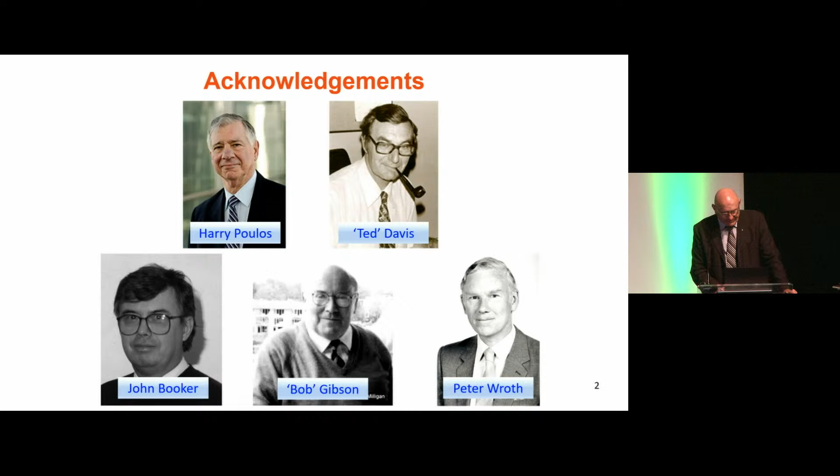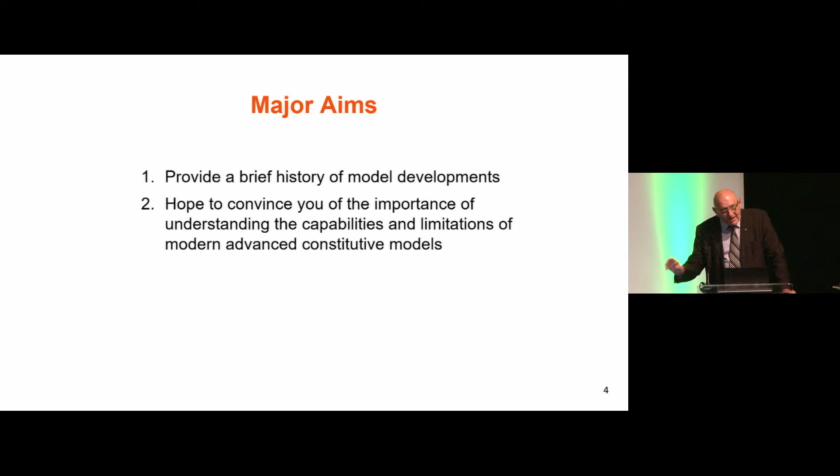My major aims in this presentation are twofold. Firstly, I'd like to present my own interpretation of what's happened in this field of significance in this field over the last 50 years or so. And secondly, I hope to convince you, if convincing is indeed necessary, of the importance of understanding the capabilities and especially the limitations of the models we use in our advanced numerical analysis these days. Many of the models that I will mention are now available in commercial software. So I think it's incumbent on those using that software and even those directing its use to understand how such models behave.

But let me begin by making a few introductory remarks about modelling in general and constitutive modelling in particular. And I think we'd all recognise that modelling is now an important aspect of geotechnical engineering. I would argue that the development and use of constitutive model involves both art and science, and I hope that will come through during this presentation. I believe it's important to understand that in any application we choose, the model we choose to adopt really is dependent on the questions that are being asked and on the particular predictions of the behaviour of the physical system that we're interested in, obviously. But we should always remember that models are merely imperfect idealisations of reality.

Perhaps the best way, or a good way to illustrate what I mean, is to consider the problem of a ship at sea, and I'm indebted to Professor Calladine of Cambridge for this nautical example. If you're the navigator of that ship, you're probably only interested in where it is in space, where it is on the ocean, what its coordinates are. So your model of that ship may be just simply a point in space. But if you're the pilot or the captain of that ship and you have to bring it into port and bring it alongside a wharf, I think you'd need more than a conceptual model that involves just a point. You probably need to know where the bow of the ship is and the stern of the ship and the beam so that you don't cause any damage. And you can extend this analogy. If you're the hydrodynamics engineer designing the hull, your geometric or conceptual model at least would be probably more than what I've just described.

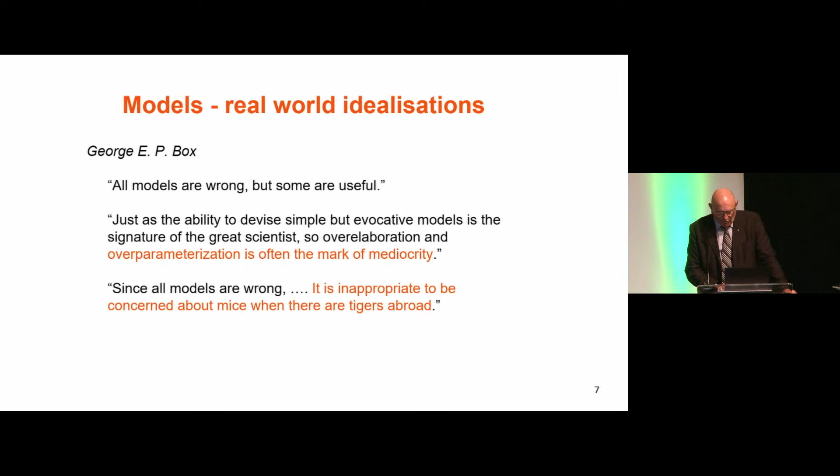Well, what are the constitutive models for soil that I'm talking about? Simply, they are mathematical relationships between stresses and strains. I'll address this issue in a little more detail as we go on, but let me assure you at the outset that as much as possible I will be emphasising the physical concepts embodied in the constitutive relations, and I'll try very hard not to obscure that with complex mathematical detail.

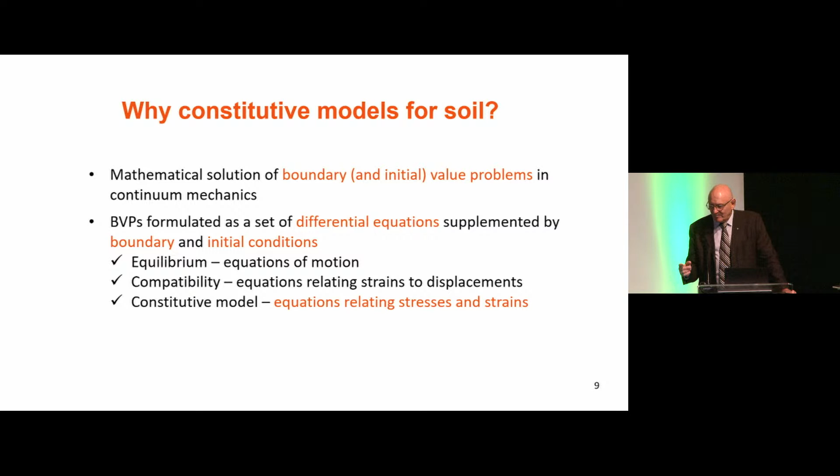Well, this slide addresses the question of why develop models at all. In computational geomechanics, we generally seek mathematical solutions to what are known as boundary value problems or initial value problems. Very often in doing so, we would represent our soil body as a continuum. It's useful to remind ourselves that these boundary value problems are usually formulated as a set of differential equations which might be subjected to particular conditions. These equations would set out in mathematical detail the three conditions of equilibrium, compatibility, and the constitutive relationships that have to be obeyed. And it's the last that I'll be focusing on in this lecture.

Now, over the last 5 or 6 decades, there's been an explosion in the number of journal and conference papers devoted to this topic. There are also excellent textbooks written on the subject. In fact, there are so many publications that I find it exceedingly difficult to keep on top of the subject and be alert to all the new ideas. There's a website devoted to the topic as well, which is rather useful.

In fact, there have been so many developments that it's impossible to cover them all adequately in one lecture, and so I will necessarily have to be selective, and I'll consider only a very small subset of the models that have been published to date. In the main, I'll concentrate on models developed either for single-phase soils or saturated soils to describe their behaviour under statically applied monotonic loading. I will briefly mention models for cyclic loading as well.

Well, it's useful to consider the various ways we might classify constitutive models for soils, and physical scale can be quite useful. We can model at various scales all the way from the quantum up to the continuum, and if you're doing molecular dynamics, of course, you'd be working at the atomic scale. If you're trying to resolve the microstructure of a material, you'd be at the mesoscale. But if we're analysing engineering structures, which is what we mostly do, we're normally working at the continuum scale, and this lecture will focus on models at the scale required for continuum analysis.

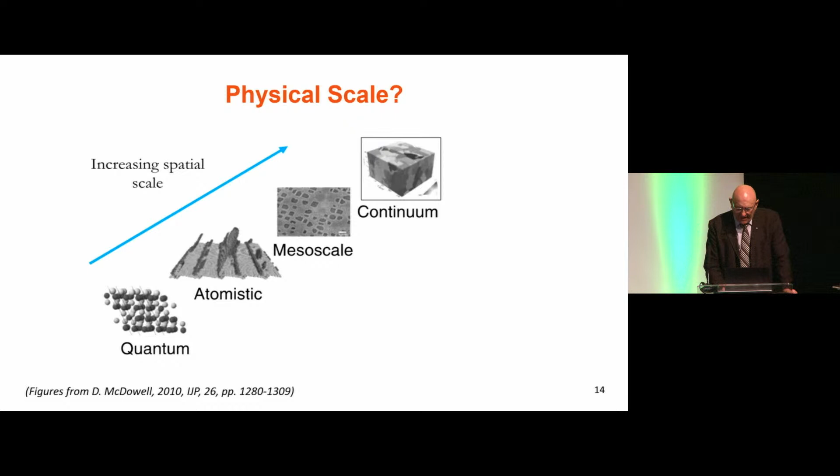And you can develop those models in at least 2 ways. You could upscale from the lower scale to the higher by homogenising in some way, or you could simply dream up relationships between the stresses and the strains. I would call that a phenomenological approach, and that's the one that I'll be talking about in this lecture.

Now, there are a number of factors that complicate the stress-strain behaviour of soils, both natural and reconstituted. They complicate the mathematical treatment because of the non-linearities they introduce, and I've listed some of the more important ones here. First, we know that most soils either harden or soften during loading, and sometimes they do both. We also know that changes in volume often accompany the shearing of the soil.

The behaviour of natural soils is often different from that same soil that's been reconstituted in the laboratory. In particular, they may possess a structure and a fabric, and they may exhibit anisotropy. Some soils are susceptible to rate, the response they provide depends on the rate at which you load them, further complicating the issue.

The loading may not be monotonic in reality. It may be cyclic, or repeated loading. And then we have the age-old problem of how do we determine the parameters. That can be very problematic.

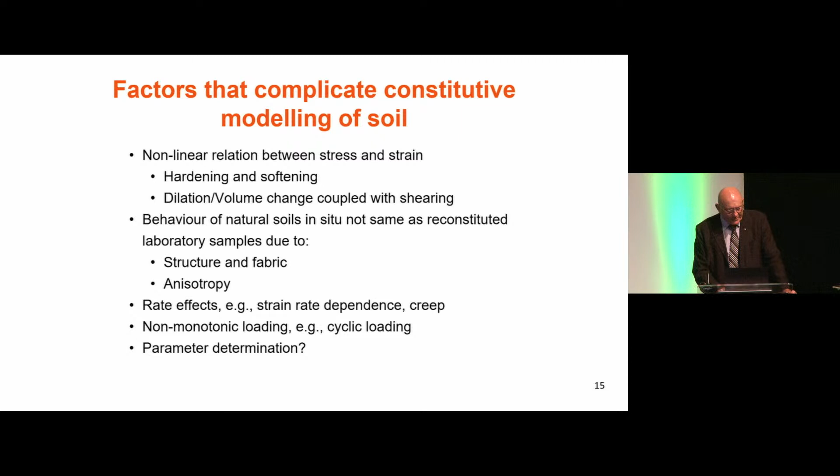Well, let me now explore some of the advanced constitutive models for soil continua. In doing so, it's worth keeping in mind the fact that this is an area of research that continues to expand, and new models seem to appear quite regularly. Given the time constraints, I'll focus solely on what I've called conventional elastoplastic constitutive models.

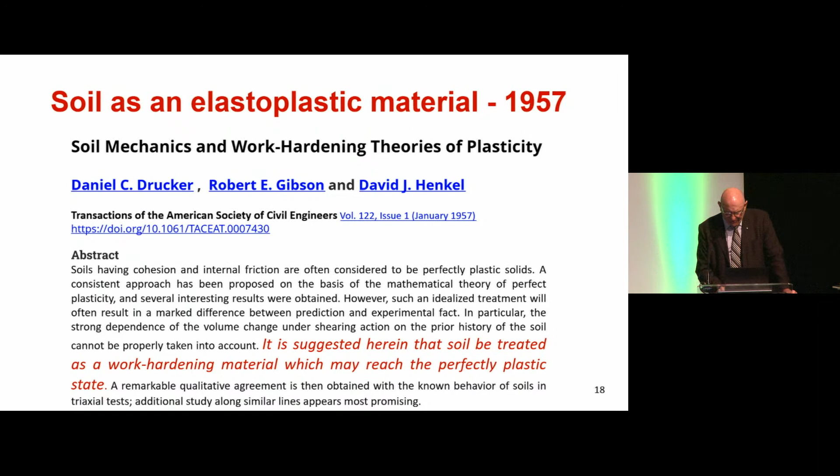One of the earliest suggestions that soil could be idealised as a work-hardening elastoplastic material was presented in the famous paper by Drucker, Gibson and Henkel in 1957. The authors didn't flesh out the detail of how this could be done, but nevertheless they pointed the way forward. At about the same time, as we know, research at Cambridge was putting some flesh on these bones that was suggested by Drucker and others. It was followed about a decade later by the first textbook describing critical state soil models.

Well, I'd like to spend a little time reminding ourselves about the essential components of such models. One of the fundamental assumptions is that the strain consists of two parts: an elastic recoverable component and a plastic irrecoverable component, and they're usually assumed to be additive. So, if I may, let us delve further, investigating, first of all, the recoverable or the elastic part.

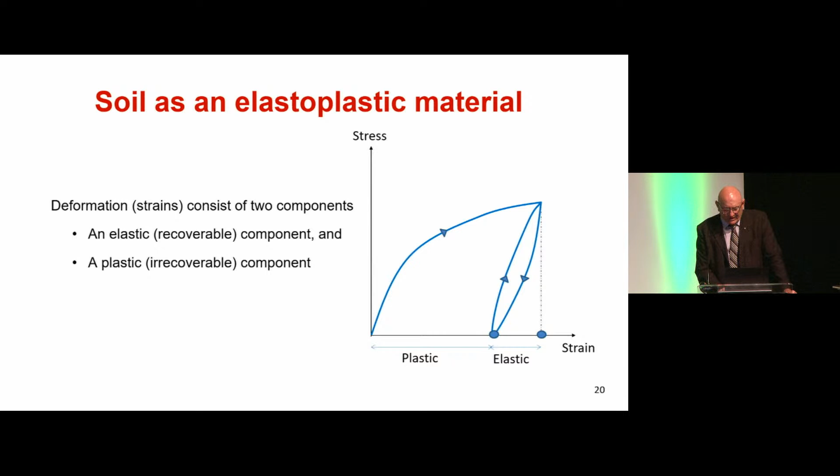Now, ideally, what's required for elastic behaviour is a model that predicts a conservative response. And by conservative, I mean if a soil element is exposed to a closed loop in stress space, then there should be no change in the configuration of the soil element. There should be no net strain. This corresponds obviously to no generation or no absorption of energy. Well, perhaps surprisingly, not all the so-called models based on the theory of elasticity that we're familiar with, and some of which we use routinely, can boast this claim.

Within the theory of elasticity, there are at least three subclasses of model. They're the hypoelastic, the elastic, and the hyperelastic model. They have distinguishing features, and some examples of them are in this table, which I don't intend to go through in great detail. Probably the most familiar is Hooke's law. The least restrictive form of the models are the so-called hypoelastic variety, and a classic example is the nonlinear elastic model introduced by Duncan and Chang way back in 1970.

Similarly, if we want to focus now on the elastoplastic constitutive models, there's a similar hierarchy or division into classes. Many of you will be familiar with the existence of modified Cam-Clay, and it's probably the most famous. It's what I'm referring to here as a conventional elastoplastic model. But in recent years, there's been a growing body of research focused on the so-called hypoplastic and hyperplastic models for soils. One of the main distinguishing features of the hypoplastic models is, unlike the classical elastoplastic models, there's no need to split the strain into the elastic and plastic components.

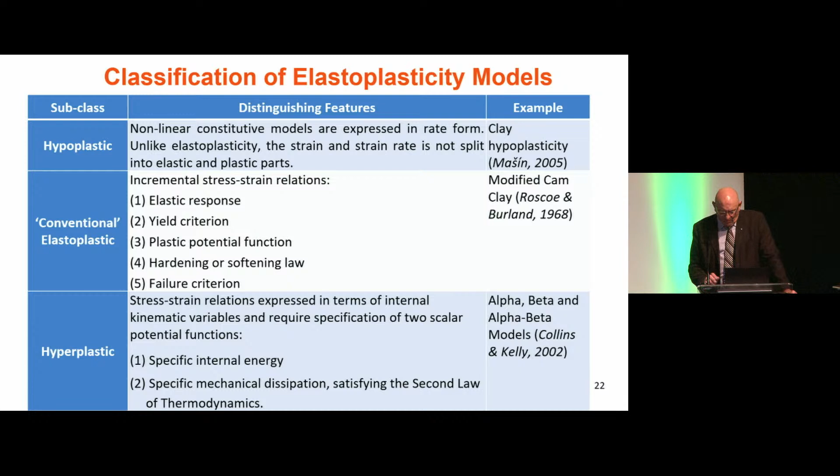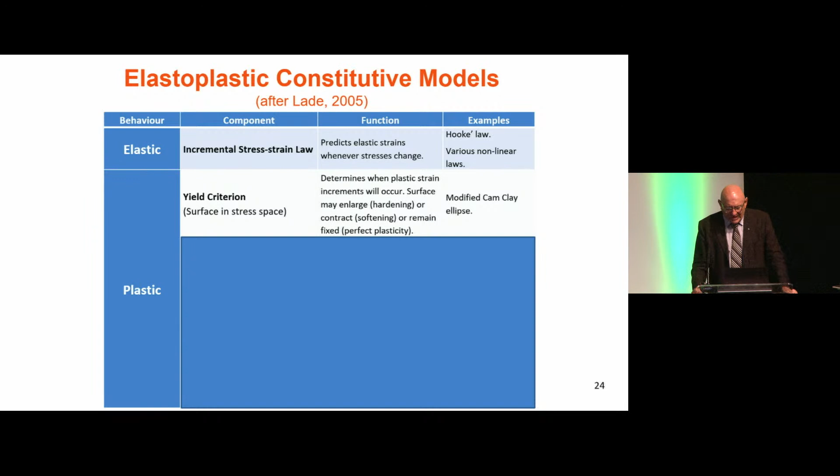Now, the table I'm showing here would be reasonably familiar, I would hope. It describes the essential components of conventional elastoplastic models. Of course, various laws could be adopted to describe the elastic component of straining, but Hooke's law is probably the most famous. But when it comes to defining the plastic component of that strain, we need four quantities or functions to be defined. First of all, a yield criterion, which is usually imagined as some surface in stress space which identifies the combinations of stress that cause plastic straining.

The second plasticity component is something that determines the relative magnitudes of the plastic strain components. The third component or function determines the actual magnitudes of those plastic strains. And of course, at the end of the day, we need a failure criterion that places a limit on the stresses that can actually be reached. The critical state line is a particularly good example of such a limit.

Well, early model developments were based on experimental data from so-called single-element laboratory tests on reconstituted soils, and we still rely on the results of such tests today for model development. But in the early days, the models were simple extensions of theories developed for metals. But unlike metals, of course, we know soils are particulate materials, and so major departures from those theories were required.

Cam-Clay and modified Cam-Clay are notable examples of those earlier theories that took into account this particulate nature and specifically allowed coupling between the volumetric and the shear behaviour. But it's important to reiterate, they were developed based on experimental data for reconstituted soil, so in my mind it would be unreasonable to expect them to describe adequately many complicated aspects of the mechanical behaviour observed for natural soils in situ.

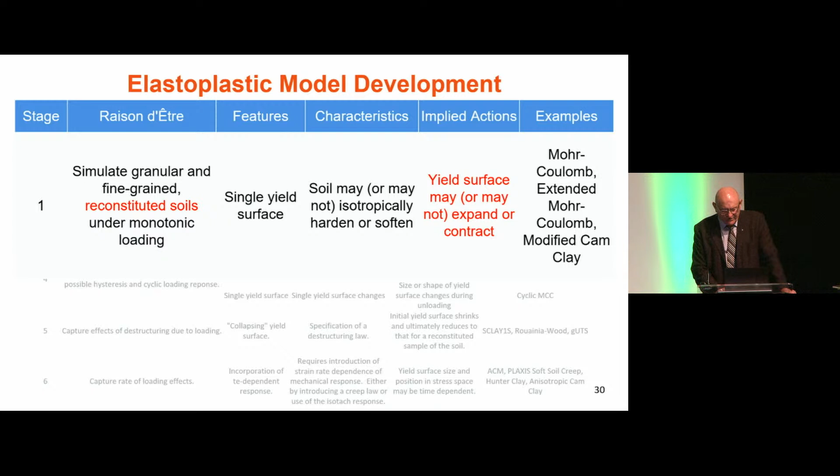Cam-Clay and modified Cam-Clay that I mentioned were very significant developments. For probably the first time, they provided the details of a complete strain hardening model for soil. And I won't spend any time going into the detail because the salient features should be fairly well known. But for the first time, we had a model that predicted in detail the effects of consolidation, for example, on shear strength. And I think that was a major achievement.

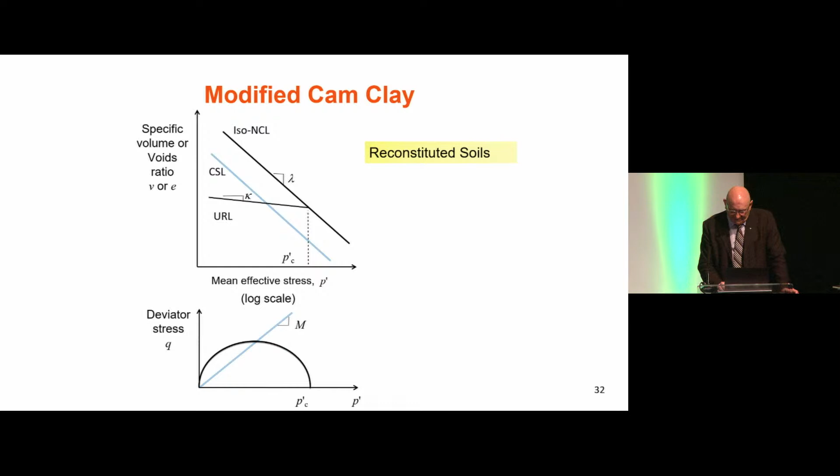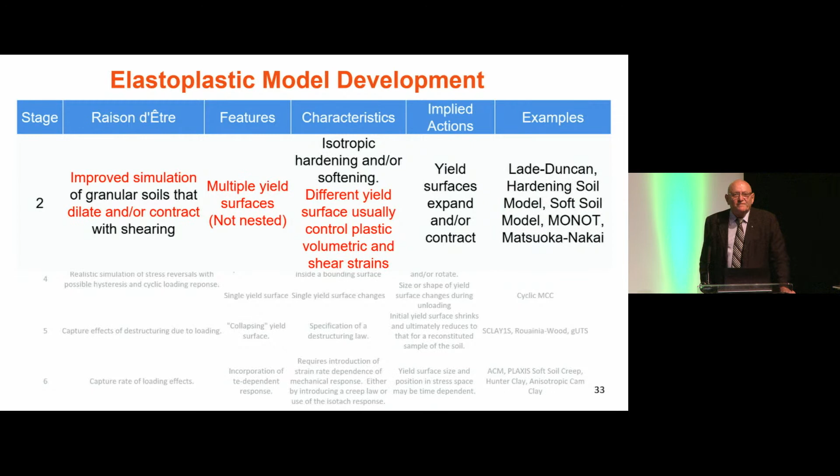Well, improvements to those early models were aimed simply at providing more accurate descriptions of the mechanical response of real soils. And some of these developments included the suggestion of, well, maybe we could use more than one yield surface, allowing the possibility of different surfaces controlling the volumetric and the shear strain hardening. And there are many examples of this type of model now available. Examples include the various hardening models that you can find encoded in commercial software packages. It's possible that some or all yield surfaces may be engaged simultaneously, so that hardening and softening could, theoretically, occur simultaneously.

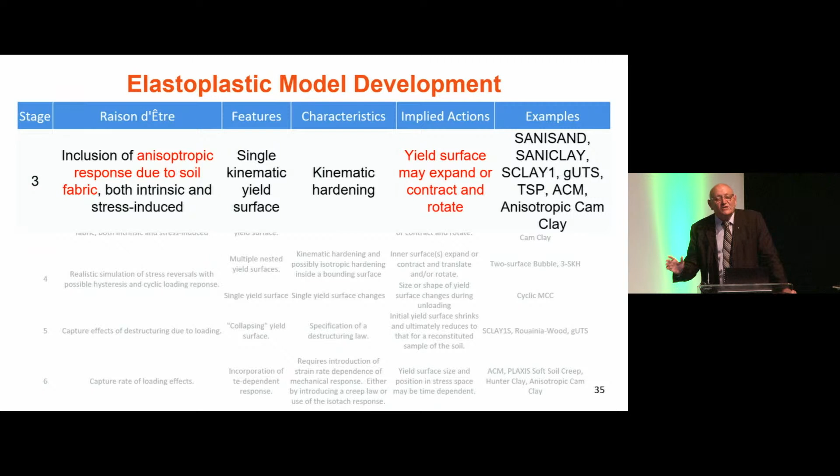And then moving on, there was recognition that many soils exhibit anisotropic response to loading or unloading. That is where the response may be directionally dependent, either intrinsically because of the nature of the soil or induced by the stresses that are being placed on the soil. And that realisation fostered the development of a whole subclass of elastoplastic models. There are numerous examples of this type of model in the literature. Just as an aside, the mathematical formulation of models to describe anisotropy requires the use of all 6 stress components or some meaningful combination of them. And this contrasts with models that describe isotropic behaviour that really only need 3 stress invariants to completely describe the behaviour.

Further model complexity and capability was added over time due to the desire to model the hysteretic response that we see when we apply stress reversals or so-called cyclic loading. In the main, that's been achieved in one of 2 ways, either with multiple nested yield surfaces or with a single yield surface that can change either its size or its shape as the loading direction changes. And I'll attempt to just briefly illustrate both of these methods.

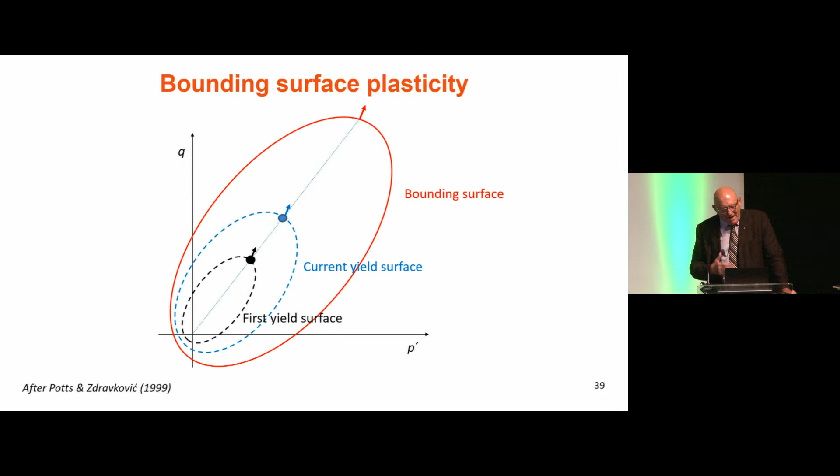But first I need to mention the concept of a bounding surface. It's an important concept that was introduced by Dafalias and others. And in some models of this type, the yield surface may expand inside the bounding surface while it obeys some mapping rule, as shown in this sequence of slides. And the following animation shows an example of the bubble model approach to describe cyclic loading, which employs a bounding surface. So for a soil that's initially K0 consolidated and then unloaded and reloaded, the progression may look like this cartoon that you're looking at now. And it normally results in the prediction of a hysteretic response.

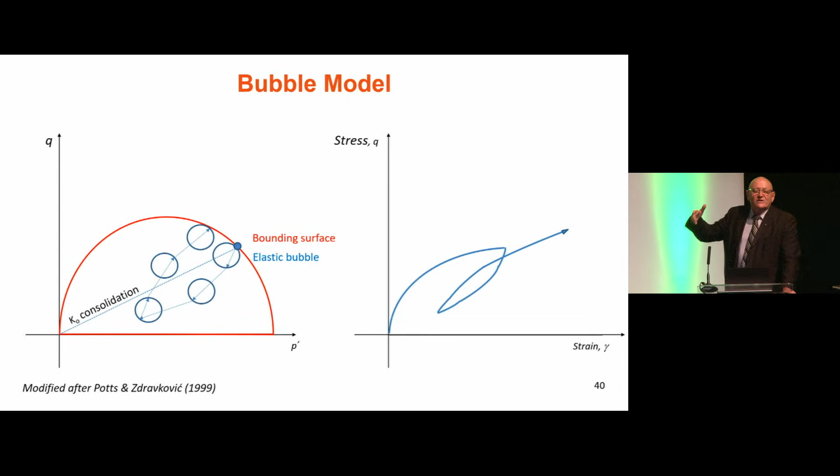we'll start out with a soil that's initially isotropically consolidated. The first half cycle of shearing causes the yield surface to expand, and of course that expansion, it's an undrained event, so it causes no volume change, provided the plastic and elastic strains exactly balance each other. Now, during the unloading, undrained unloading, the soil, in this model, would behave elastically, and it's isotropic, so the stress path must move vertically downwards. The yield surface size in this particular model needs to be maintained as constant to uphold the condition of zero volume change, but it may change its shape.

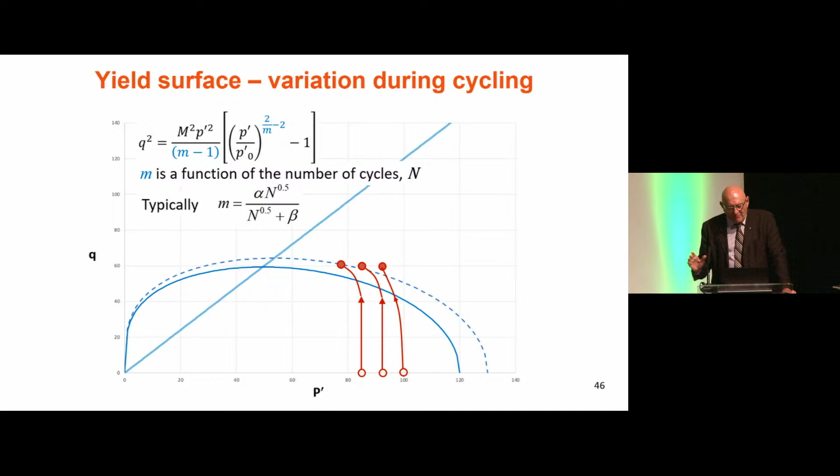And this can be achieved if you somehow allow that parameter m, which governs the yield surface shape, to be some function of the cyclic loading, the number of cycles, for example. So that by the time you go through up to 2.5 cycles of loading, you would have changed the shape in various ways. And the trick in applying this to the prediction of cyclic loading behaviour is to define how that parameter m changes as the cycling changes. One possibility is indicated in this diagram. There could be many other choices, and of course it has to be recognised this is a purely phenomenological approach to the problem, but I would contend that it does have some utility.

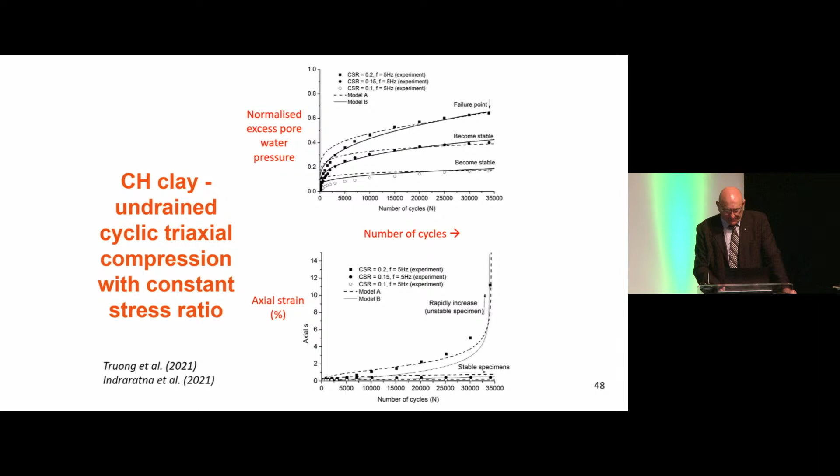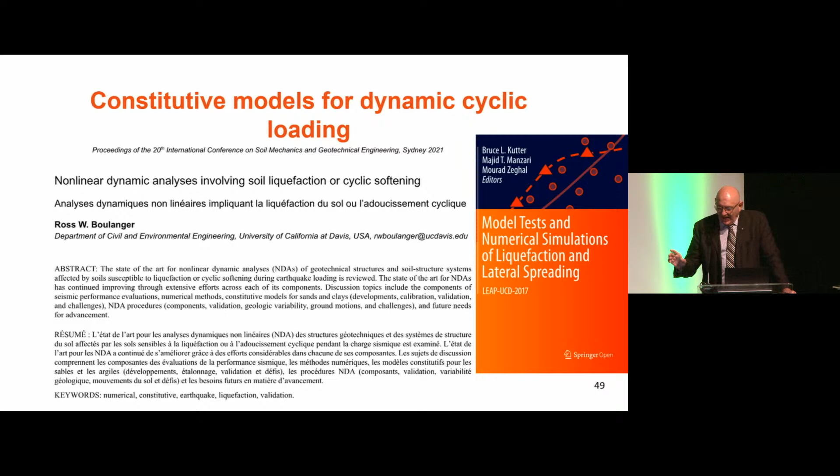Well, this is a bit of an aside, but perhaps it's curious, I think, that there's already been a great deal of work investigating constitutive models that can be used to predict soil behaviour under rapidly applied cyclic loading. I'm talking about problems that involve a dynamic loading component as well as simple reversal of the load, the sort of loading you'd experience during an earthquake. And I won't be covering this aspect in this lecture, but I'd refer you to an excellent summary that was a state-of-the-art paper in the most recent ISSMGE conference held in Sydney. And in that paper, the author Ross Boulanger made great use of and great reference to a very detailed set of liquefaction studies reported in the proceedings that I've just brought up on the screen.

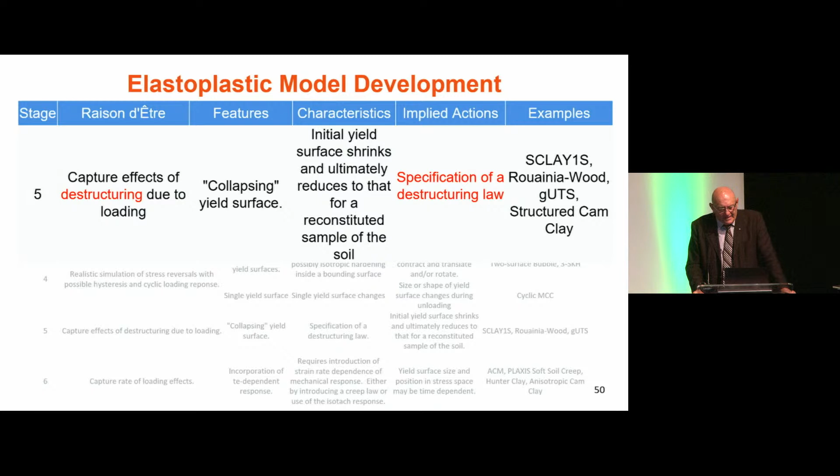Well, moving on, another feature of real soil behaviour that has been incorporated in our advanced soil models is the effect of soil structure, and in particular any effects of destructuring, or some may call it destructuration, that occurs as the soil is further loaded or perturbed. And these models should generally provide predictions of real soil behaviour that will eventually approach the behaviour that you observe for a reconstituted soil as the structure is progressively removed by the continued loading. So they require specification of how destructuring will occur with loading.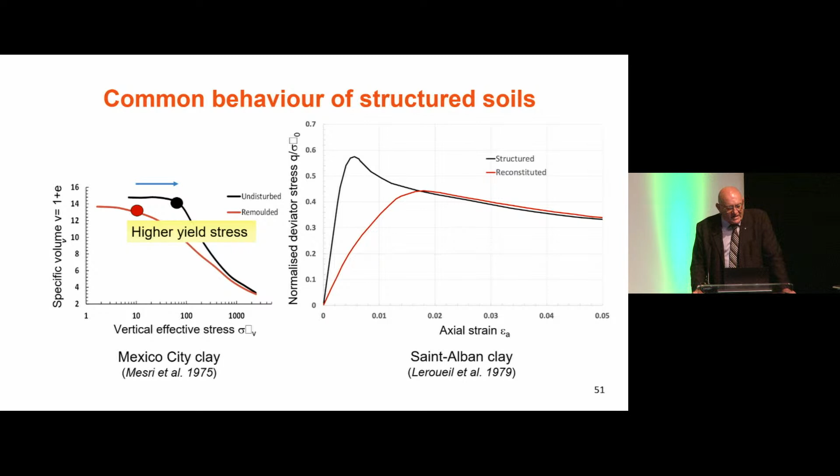And if one conducts shear tests on a structured material and compares it with the same soil that's just been reconstituted, you might get a comparison like you see here, and a suggestion that the structured material might have a higher peak strength. So those are the sort of features that we need to capture in our models of structured materials, and the progressive destructuring that will occur once we continue on with the loading.

So some of the distinguishing features of successful models for structured soil are, firstly, the structured material should have a larger yield surface and larger voids ratio at the same value of mean effective stress. And you need a means of describing any destructuring or destructuration that will take place with increasing stress level.

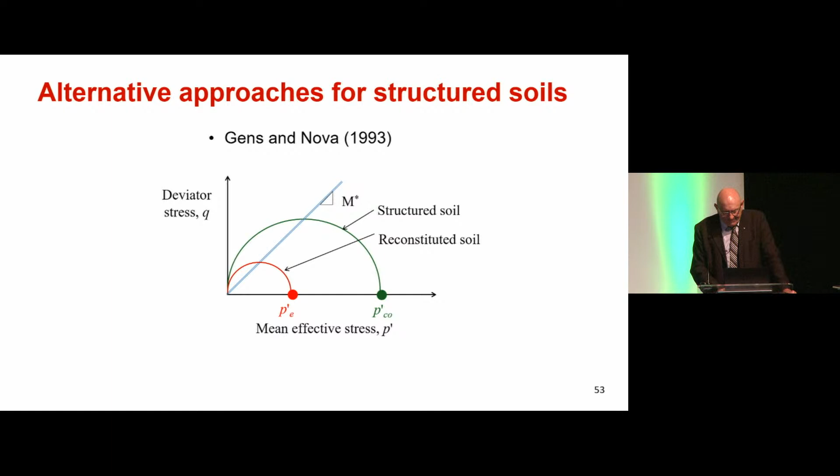Well, several approaches have been suggested for modelling this class of material, and in 1993, Antonio Gens and Roberto Nova suggested one such approach. They assumed that the ratio of the sizes of the yield surface for the structured soil compared to the one for the reconstituted soil could be described as some function of plastic straining, perhaps more specifically, some combination of the plastic volumetric and plastic shear strain components. And it seemed a sensible way forward.

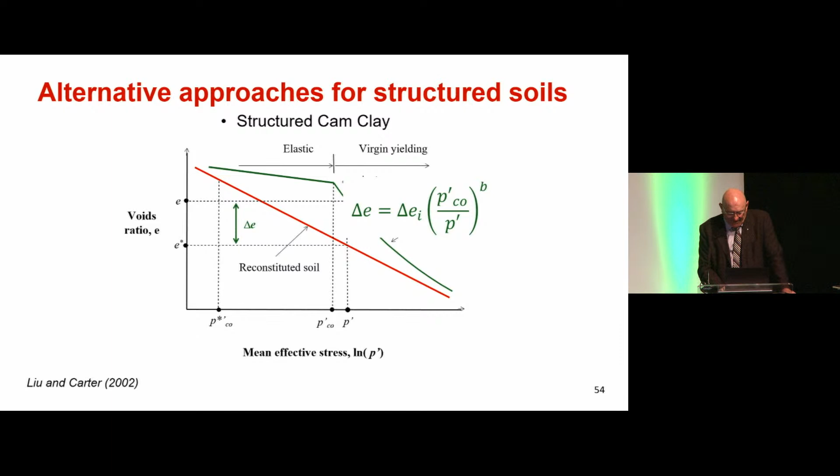Well, you notice that at any pressure, the two curves are separated by an additional voids ratio I've called delta e. There are two portions of the green curve, there's a sort of division at a pressure I've indicated as p'c0. So at any consolidation pressure less than p'c0, it's assumed that the behaviour is elastic and therefore recoverable, but beyond p'c0, plastic straining takes place, and this is described as virgin yielding. We discovered that a simple exponential function could be fitted to that data for a whole host of soils that we looked at. So one can describe the descending, plastic portion of that curve for the structured soil by defining how the voids ratio that's sustained by structure gradually reduces.

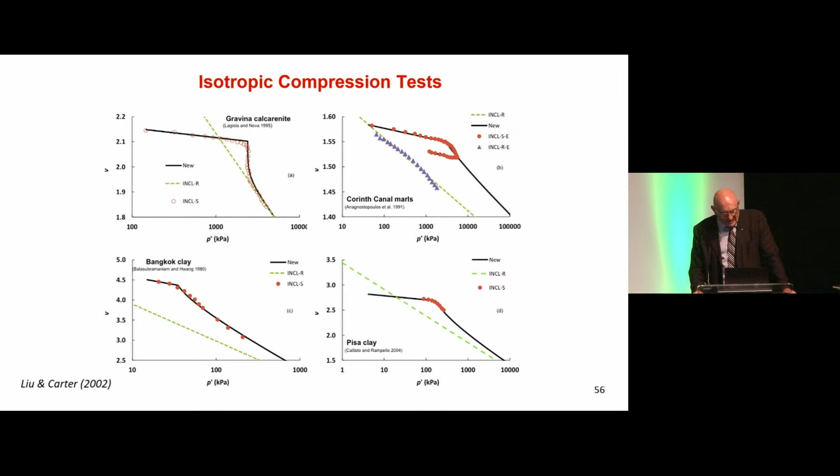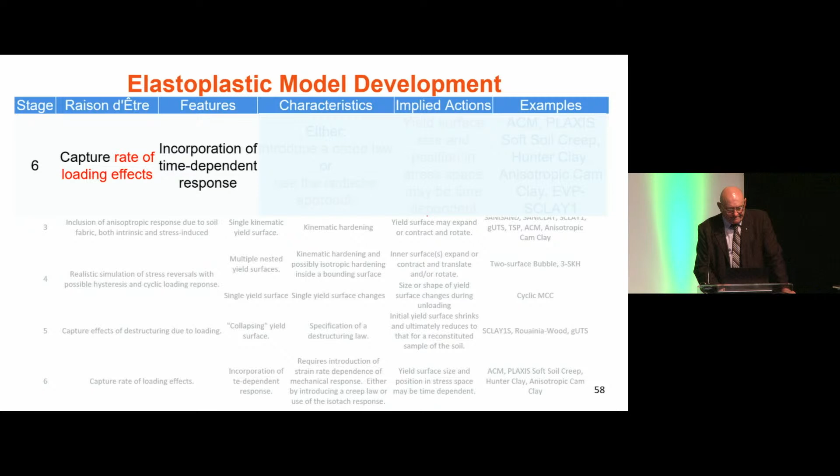Well, moving on again, one of the most difficult features to include in soil constitutive models, in my opinion anyway, and probably the least developed area of research, not that people aren't working on it, is trying to work out how to effectively and adequately include the rate of loading and its effects into a constitutive model. It's an area that I think needs more work. The way this is done at the moment is either you introduce some form of creep law into the constitutive model, which then invokes the theory of elasto-viscoplasticity, or you can use what's known as the isotach approach, in which case the behaviour is assumed to depend on the rate of straining in some way.

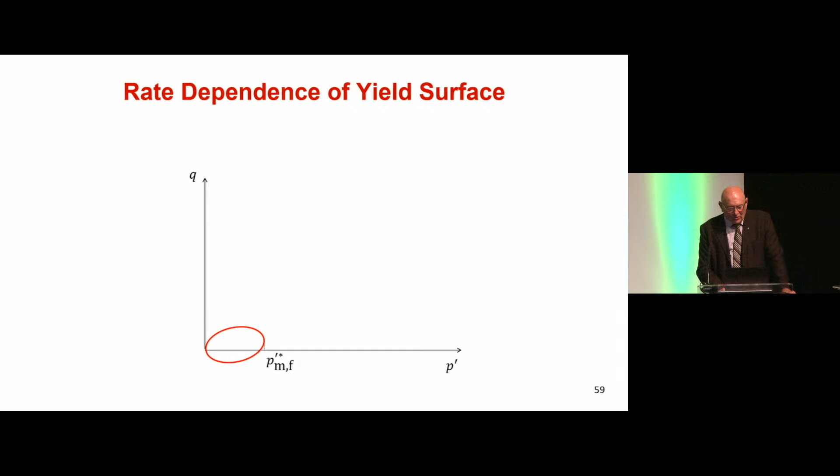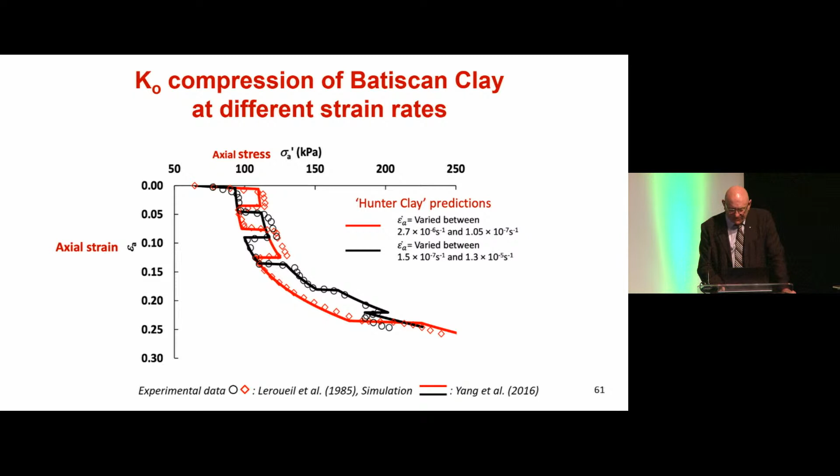And you can see it's possible to get a reasonable match. But as I said, I think there's still scope for further work. An alternative approach utilises, as I mentioned, the theory of elasto-viscoplasticity.

If I may, I'd now like to mention the quest to obtain unified soil models. I mean, models that can cover all types of soil regardless of particle size, where the only difference, say, between a sand and a clay might be the choice of the values for the model input parameters. And there are several examples of these models in the literature. They include a model known as CASM, clay and sand model, I think it stands for.

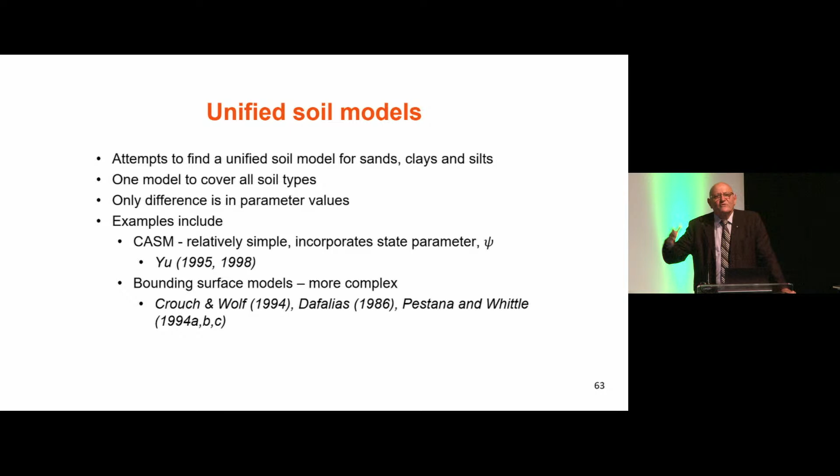But there are also various bounding surface models that I mentioned previously. If I may, I'd like to just talk about one of them. It's the model CASM, developed originally by Hai-Sui Yu and later extended by him and his colleagues. And a key feature of this model is the incorporation of what is known as the state parameter, which I should now describe for those unfamiliar with it.

In my opinion, it's one of the very significant developments in constitutive modelling over the past 50 years, and it involved the introduction of this concept of a state parameter by Been and Jefferies and recognition of its significance. It has a simple definition. It's the difference between the current voids ratio and the voids ratio on the critical state line at the same mean effective stress. In other words, just simply the vertical distance of the current stress point to the critical state line. It turns out that this parameter is very significant in determining how granular soils will behave when loaded.

For initially dense sands that must dilate to reach their critical state, the parameter psi, or the state parameter, takes negative values, and if the sand is initially very loose and must compress to get to critical state, then the state parameter takes positive values.

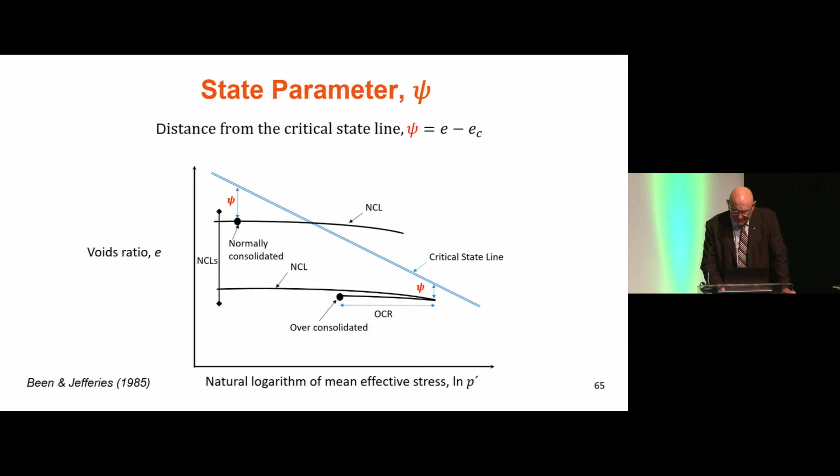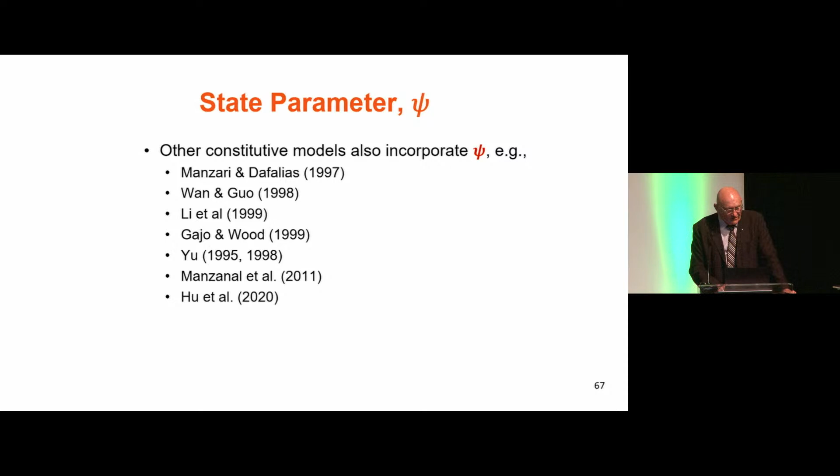Well, before moving on, I should remark that there are numerous constitutive models now that incorporate this state parameter psi, and I've listed some of them on the slide. Well, an important question, I think, that always should be on an analyst's mind when they're tackling a problem in computational geomechanics is, well, which model should I choose?

Well, that said, I think we should also appreciate that there may be more than one model that will fit the bill. More formally, we can consider a typical list of the factors that may be taken into account when selecting a constitutive model. They should obviously include the type or types of soil you've got, the loading that you're anticipating, and any particularly important or peculiar aspects of the problem that you're examining. And we'll see later in an example I will present how the choice of the wrong model can have quite catastrophic consequences.

So one of the most important considerations should be what type of application do you have in mind, what problems are you trying to solve? And I'd like to look at this issue in a little more detail, and I confess this is another very busy slide, so if you will allow me to unpick some of it, I will do so.

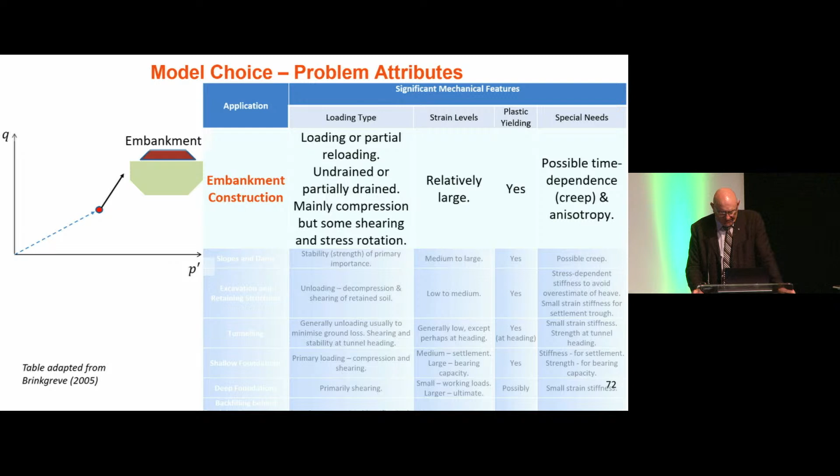For example, if the problem at hand involves embankment construction, then the following model features are probably important. The loading will mostly involve soil compression with perhaps some shearing and stress rotation under the edges of the embankment. The strain levels you might anticipate are likely to be relatively large, and you might also need to think carefully whether rate effects should be included, because often you're on very soft soils that creep.

On the other hand, if the problem considered involves excavation or retention of soil, then unloading and decompression of that soil will be important, and normally would involve low to medium levels of straining. And in such cases, it's more likely that models that include stress-dependent stiffness will provide more accurate predictions than some simpler models. And so on for the other types of application. I won't go through them all here, but a form of this table will appear in the written version of this lecture.

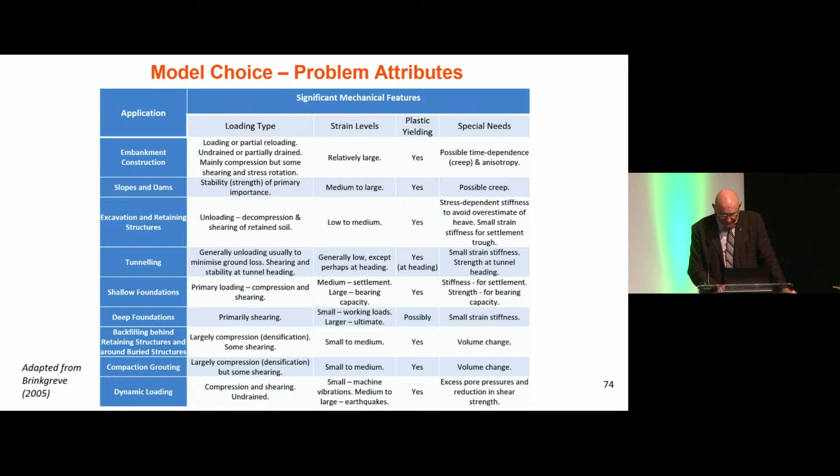As I said earlier, another important issue is, well, what models are available in commercial software. I foolishly started preparing a list, or it turns out it was foolish, of what models were available in commercial software some years ago. But I eventually came to the conclusion this was a rather futile exercise, simply because the scene was changing quite rapidly and any list would soon be out of date. But I did note that Mohr-Coulomb and modified Cam clay models appear to be ubiquitous in the commercial software. In this day and age, one can simply trawl the internet and look for software user manuals to see what models are available.

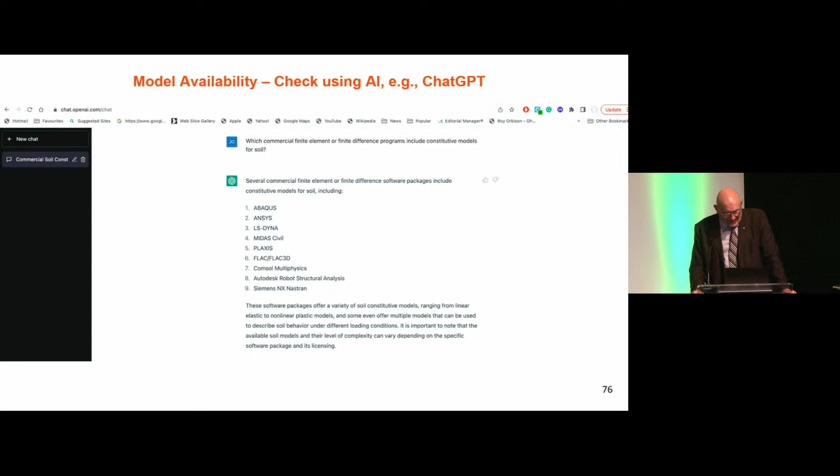Or as shown in this slide, you can make use of artificial intelligence tools that are becoming readily available to do that trawling for you. Who knows, one day they may be able to produce a Rankine lecture for you. But anyway, let me now address the problem of how do we, or how should we, evaluate the accuracy and the effectiveness of a soil constitutive model.

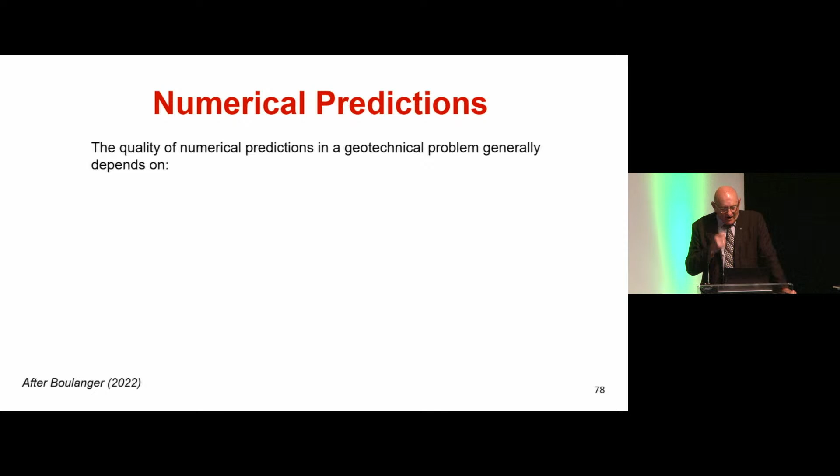Before addressing that particular question directly, it's worthwhile to consider more broadly what influences the accuracy and quality of the numerical predictions, the predictions of our numerical models. And a neat summary of the major influences was provided in a recent paper by Boulanger, and the major factors he listed I've also repeated here. And apart from the obvious factors such as how well you've characterised the soils at the site and characterised the site itself, and how clever your numerical tool is, the choice of the constitutive model and how well that model has been calibrated are also very important.

A thorough evaluation of a numerical model prediction may involve several stages, and the first usually involves comparing predictions of your chosen constitutive model against the results of single element laboratory tests conducted on soil samples in the laboratory, and that's a process that many would call calibration. A second stage in working out how good your numerical model is, you might want to compare solutions of your numerical model with known solutions for boundary problems for which there are either exact or even approximate solutions. And a particular example is the cavity expansion problem that I'll talk about in just a moment.

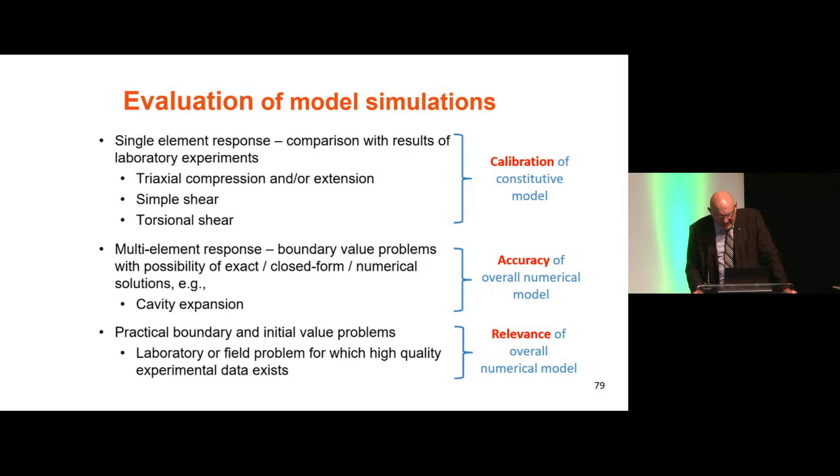The last step is the relevance of the numerical model. How do you ascertain that? Well, there's really no other way than comparing the predictions of your overall model with the results of experimental tests, either conducted in the laboratory at 1G or in a centrifuge, or alternatively by comparing its predictions with field measurements. And probably that's the ideal way to do it.

So a schematic representation of the problem in an elastoplastic soil continuum is shown here. The cavity could be cylindrical or it could be spherical. It's normally assumed the soil is under an initial isotropic effective stress p0, and as the internal cavity pressure is increased, the soil in the cavity begins to expand, and the soil in the immediate vicinity of the cavity wall will eventually yield plastically, and the plastic zone will grow as the internal pressure continues to increase, and eventually you'll get to a limiting pressure.

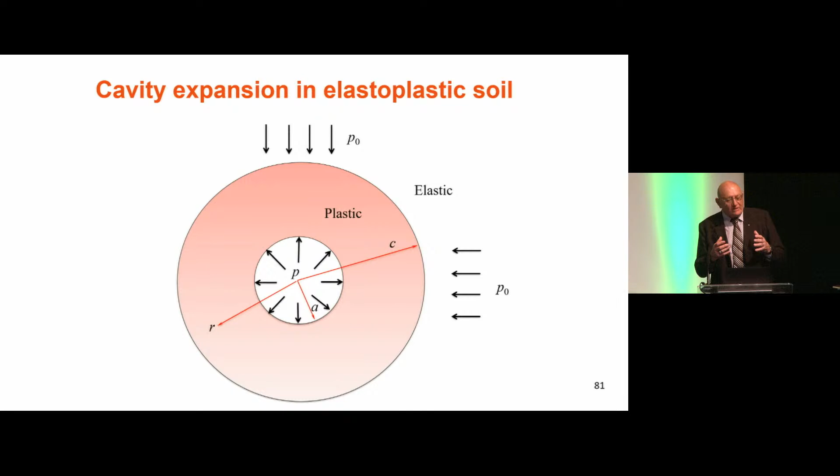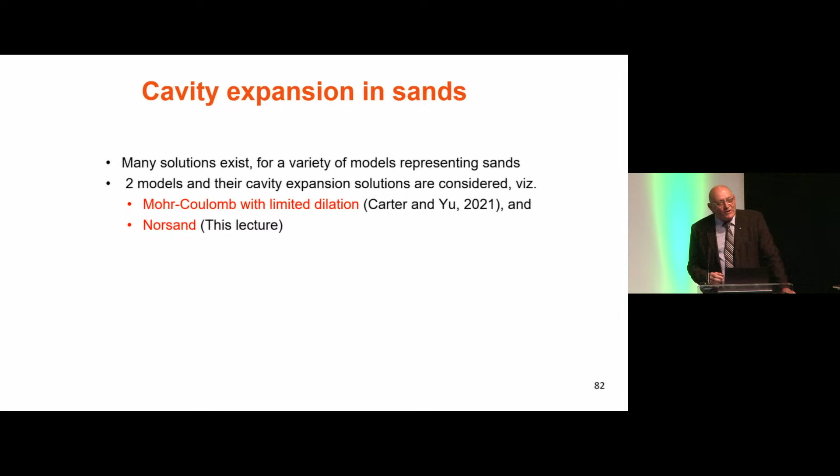So as an example, I'd like to examine cavity expansion in sand, assuming fully drained conditions. And the literature contains numerous solutions to this problem. In this lecture, I just want to consider two of them. One involves good old Mohr-Coulomb, but a version of Mohr-Coulomb that has a restricted amount of dilation. The dilation doesn't go on forever. And the other I want to consider is a more sophisticated sand model known as NorSand.

The endpoints on these curves are of some interest. The blue circle corresponds to the case where you allow no dilation, so it's a material that doesn't dilate at all, and it's got the lowest predicted cavity pressure, as you might expect. The brown squares are rather interesting. They correspond to the case where the limit pressure at the cavity boundary is reached at exactly the same instant that the maximum plastic volumetric strain is reached at that boundary. If there's no limit on the dilation, you'd get a limit pressure predicted by that arrow I just introduced into the figure. And finally, we can see that even a limited amount of dilation has a very significant effect on the predicted limit pressure.

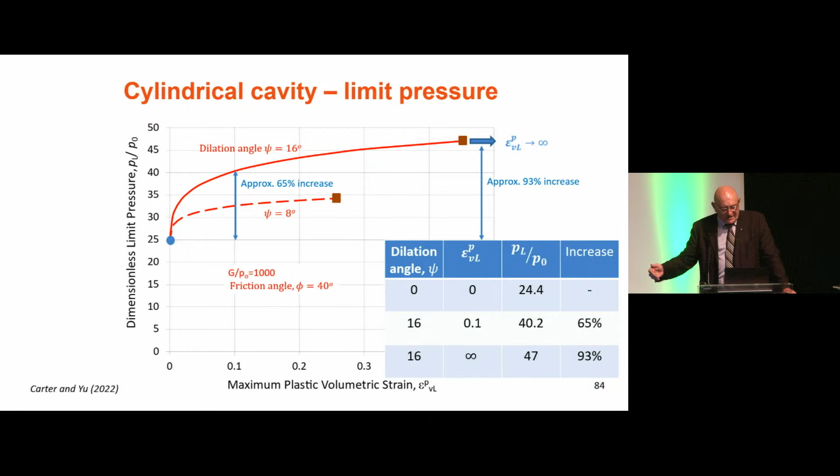For example, if you allow a modest amount of plastic straining of 10% volumetric strain, for the case I've shown, the limit pressure is increased by 65% above the limit pressure in a soil that would not dilate. And this can be compared with a 93% increase in a material which is allowed to go on dilating as long as it wishes. So it's a case of a little bit of dilation going a very long way in a highly constrained problem like this one. Clearly, the constitutive model does not require great complexity in order to provide some meaningful clues about the behaviour of this ideal material, especially if you're interested in limiting conditions.

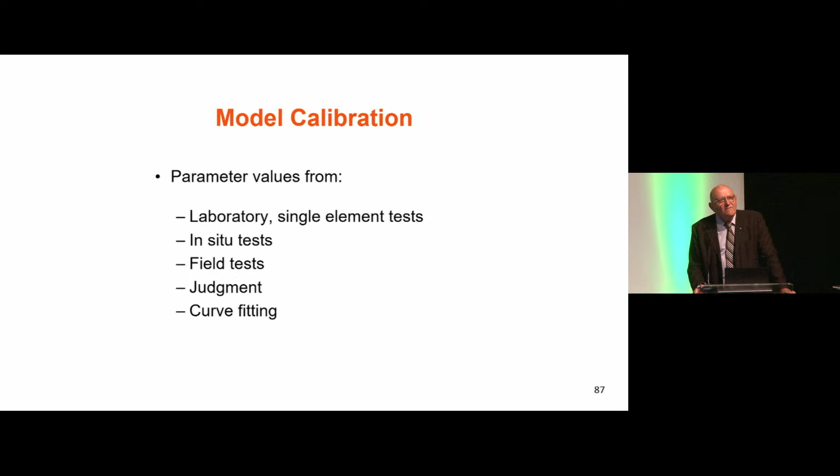Well, I don't have time in this lecture to talk about specific models and how one would go about determining the values for each and every one of their parameters. But what I would like to do is make an appeal for modellers to provide clear guidelines for how they suggest these parameters should be determined. And if you will allow me, I'd like to point out a very recent example of what I think is good practice in this regard.

That said, I should acknowledge that such advice has been provided and presented in the past by other model developers, not necessarily in the form of a flowchart. It's clear guidance on how to select the parameter values that I would really like to see, and that's not always been the case. And by way of confession, I would count myself amongst the guilty.

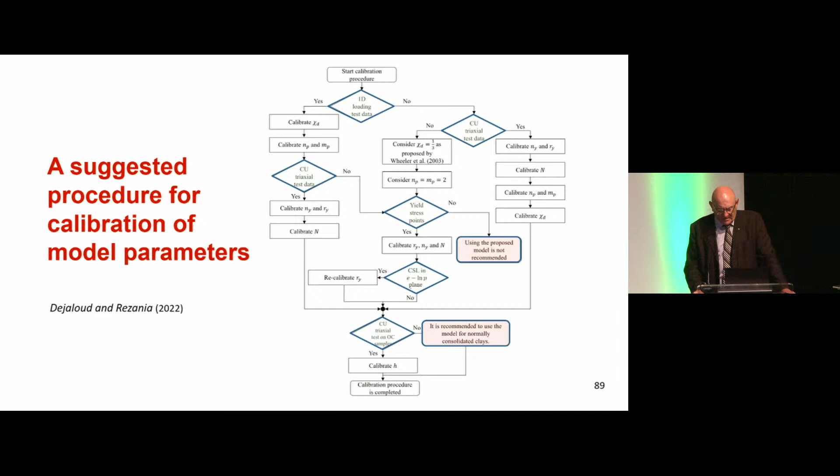So that brings me to the part of the presentation in which I'd like to demonstrate some of the things that one can do with the models we've developed up to date. I must stress again at the outset that successful application of these models does require some compromise and some approximation, and one does not always have to hand all the information, the hard facts and the data required to give you confidence that the correct model and the value of its input parameters are suitable for the problem at hand. And good old engineering judgment is usually required. And in this type of task, I personally believe in potency above purity.

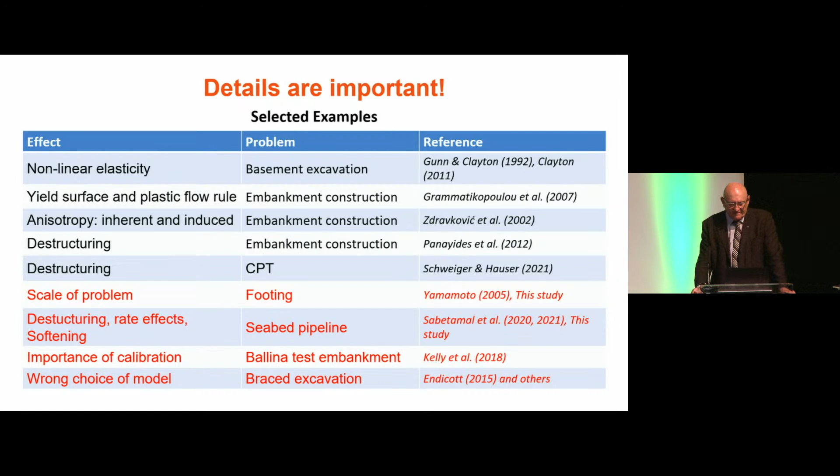Some of the lessons to be gained from studying cases like these are well known in the research community, or at least they should be, in my view. But I do think they bear repeating here in the hope that they may assist others to make some sensible choices when considering which model to adopt and which features of the model are really important. And I've also included an example at the end of what can go wrong if an inappropriate model is selected.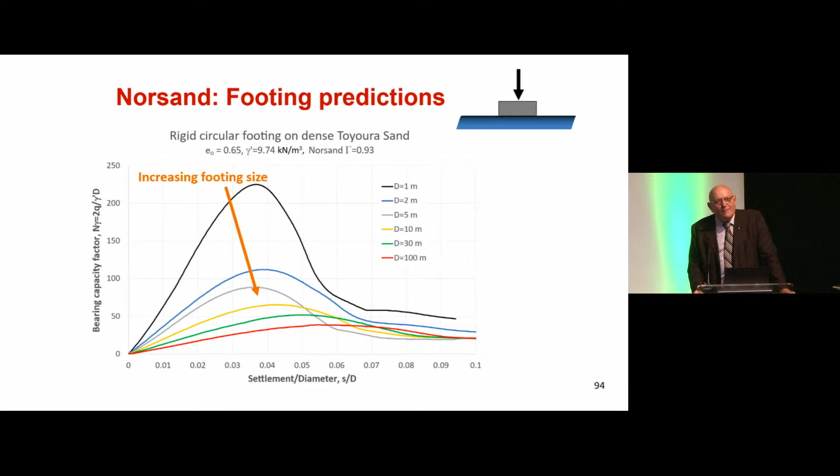And you note the very marked effect of footing size. As the diameter increases, the predicted peak bearing capacity factor reduces, and this is, I believe, consistent with our practical experience. And you note that the post-peak softening seems to reduce for the larger footings. And if a 100-metre diameter circular footing worries you, just think offshore gravity platforms.

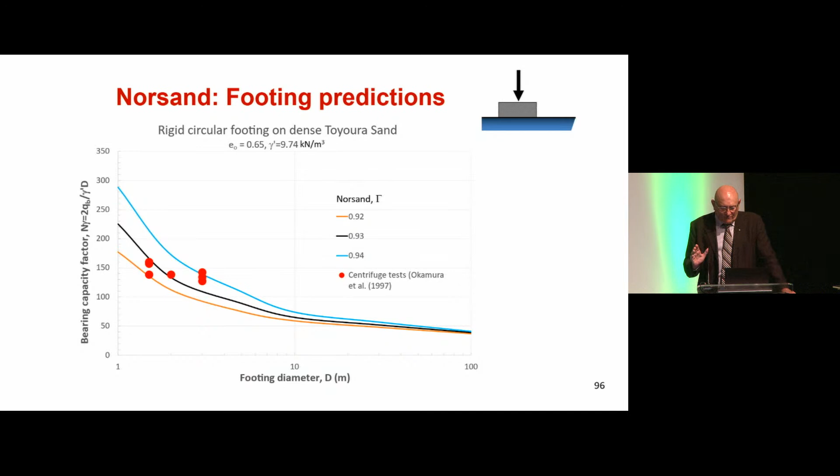And just in case you may think these theoretical results are perhaps a tad fanciful, what I've just put up are the results for maximum bearing capacity factors observed in a series of centrifuge tests on Toyoura sand, and the graph appears to show reasonable agreement. But in this context, I want to reiterate, all models are wrong, but some may be useful.

Well, now I'd like to move on and present an example of a boundary value problem that involves large deformations, a type of problem that, as you heard from Mark, is near to my heart. My aim in presenting it is to demonstrate that the level of sophistication of the chosen soil constitutive model should match the requirements of your analysis, and I want to demonstrate the effect of allowing for various features that might present themselves as very large straining occurs. And in particular, I want to consider the significance of destructuring, rate effects and softening.

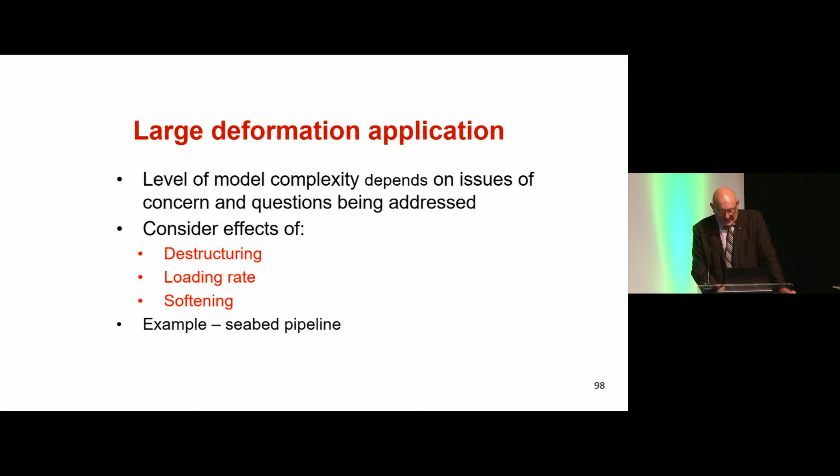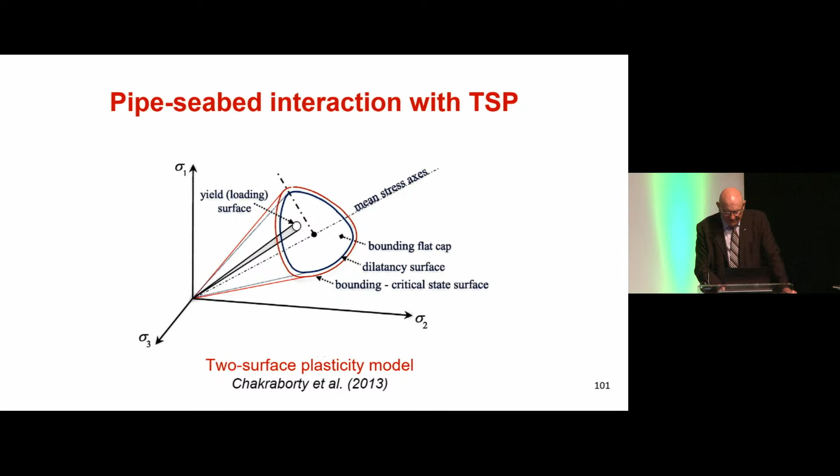Well, a different but very similar pipe penetration problem was studied in detail, and we used a two-surface yield model, which had the additional capability of capturing softening of the soil as straining increased from critical state to the residual condition. And it was achieved fairly simplistically by using a two-surface model, as you see here, but one which allowed the friction angle to eventually reduce with straining. I won't go into the details, I'll simply move to the results.

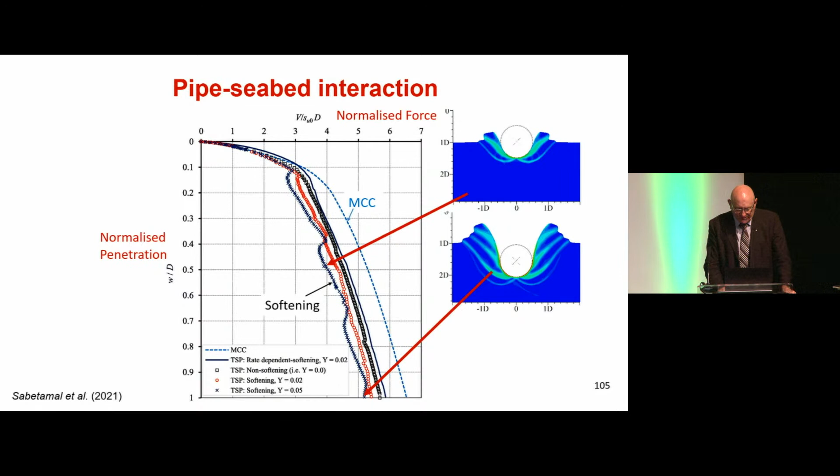Well, moving on, in this context of considering boundary value problems, I'd like to mention a fairly recent prediction exercise that was associated with the Ballina test embankment in the state of New South Wales in Australia, because I think it contains some important lessons for the users of numerical methods and constitutive models. Well, in this exercise, people from all over the world were invited to predict various aspects of the behaviour of this heavily instrumented test embankment that was constructed on soft estuarine deposits. And the predictors were all provided with, well, it was a vast amount of laboratory and in situ test data. And the reason for providing it was to allow them to calibrate their constitutive models prior to them making their predictions of the embankment response.

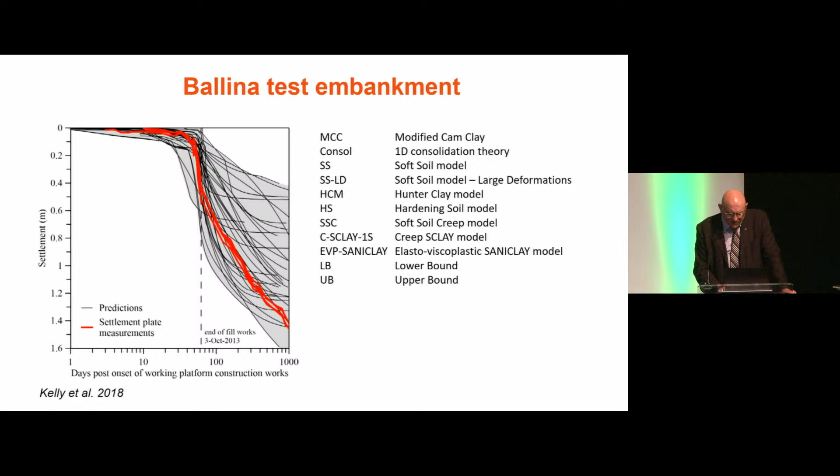And shown here are some predictions of the time settlement response of the embankment together with the field measurements of that settlement shown in red. And it's obvious the large amount of scatter that has occurred in these predictions. And to many in this room, that may not be a huge surprise. And here is a little detail on some of the types of approach and the various constitutive models that were employed in this exercise, and there's quite a range of them. So you may well ask, well, what are the lessons from this type of activity? We've got such a large range of predicted results.

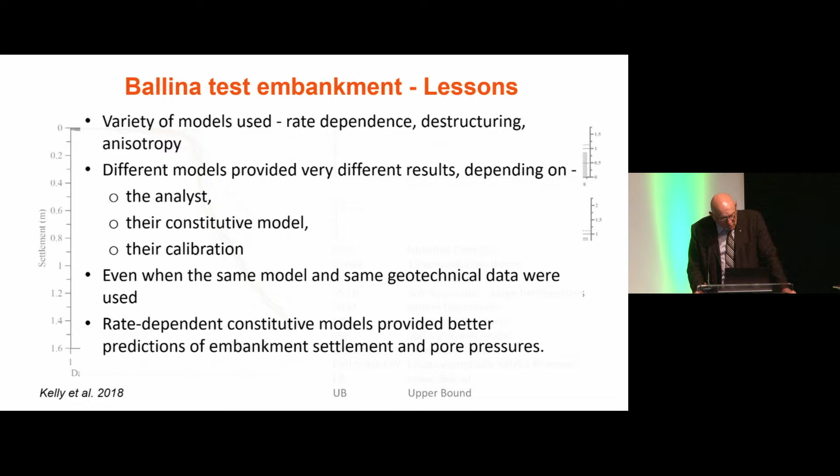Well, first I should note that there was a variety of constitutive models adopted, but most included some allowance for rate dependency and destructuring and anisotropy that I've spoken about. But the different models provided quite different results depending on who was making the prediction, their chosen constitutive model, and importantly, how much attention they paid to the task of first calibrating that model. And even those who adopted the same model and were given the same set of geotechnical data, they came up with, in some cases, quite different predictions. I can just note simply that the models that allowed for some rate dependence generally provided the more accurate predictions. And most importantly, what this exercise taught us, yet again perhaps, was the importance of the calibration process when making predictions of this type. It really is essential.

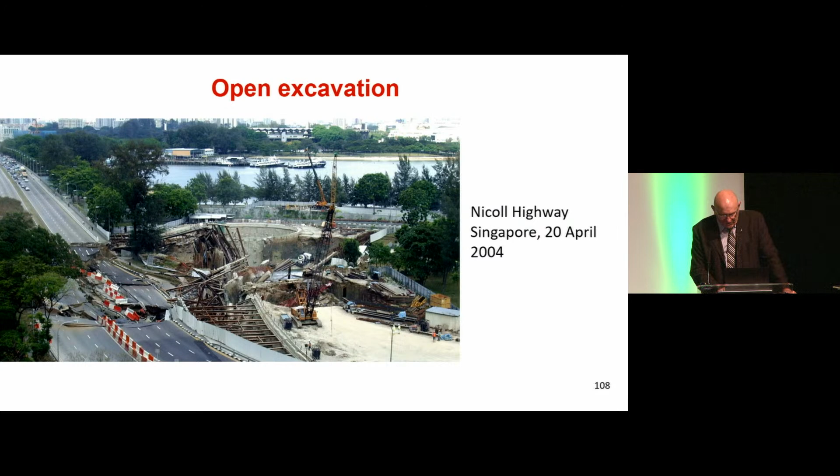Now, the collapse was the subject of a formal inquiry, and the committee charged with undertaking that inquiry reported that there was, and I quote from the report, an "abuse of the back analysis", end quote. I should note that most of the soil at the site was a soft marine clay. And in effect, the wrong constitutive model was adopted in numerical analyses of the wall, conducted both at the design stage and in the back analyses conducted during construction. And this was identified as a key factor contributing to the collapse. There were other factors, it wasn't alone, other factors contributed, but certainly choosing the wrong constitutive model was an important contributing factor. And I'd now like to attempt to explain briefly and in simple terms the error in that choice of the constitutive model.

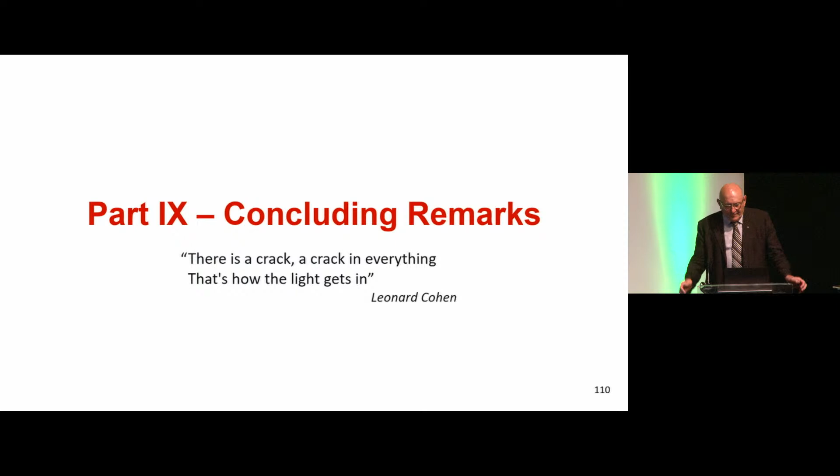I'd like to wind up the presentation by recapping and stating just a few fairly obvious conclusions. Some of my comments may seem obvious, even banal if you will, but I do think it's important for us to recognise and celebrate what's been achieved over the years and what still limits the reliable use of numerical packages that employ our constitutive models. I focused here just on classical elastoplastic constitutive models. This is only a subset of what's out there and what could be used.

But I would contend we have come a long way in 50 years, and you've got these advanced models now available in commercial packages. The trick is to use them correctly. I also should repeat that the perfect model has not been invented and probably never will be. And in this regard, I like to be comforted by the Japanese philosophy, which crudely stated is, there are three simple realities. Nothing lasts, nothing is finished, and nothing is perfect.

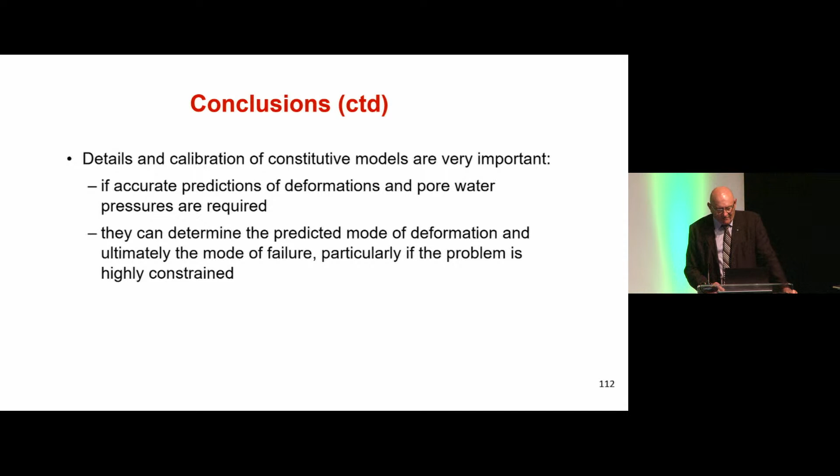I would also contend that you really need to know the details of your constitutive models if you want accurate predictions, certainly of deformations, and they will control the mode of deformation and ultimately the mode of failure, and that's particularly important in problems that are highly constrained.

And may I end with a simple plea. I think it's incumbent on those who undertake numerical modelling and who frankly are brave enough to try and predict the future to simplify their models as much as possible. And in this regard, knowing what to ignore is really a key skill. That concludes my presentation. Thank you very much for your attention.